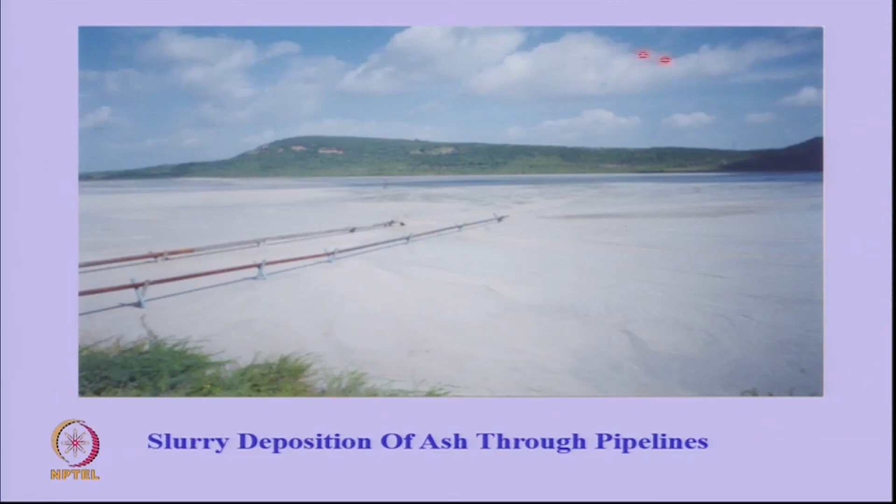So at the tail end of a mine, it's called mine tailings slurry, and there are other types of slurries with which you deal. So we're going to look at some slurry waste disposal sites and what they look like. So this is a huge area adjacent to one of the thermal power stations. This is coal ash. This is water. The ash is coming in these pipelines and being deposited here. And just to get an idea, maybe this is 2 kilometers by 1 kilometer in size.

So on 3 sides are hills. On one side is an embankment. Just like you create a water reservoir, you have created a pond in which the slurry will be deposited. The technique is very simple. You deposit your slurry coming out of a pipeline in a pond. Within a few hours, the particles will settle down and clean water will be at the top. You take it back for transporting more material.

So the water used for making slurry is just a medium for transporting these particles. And it's good because you can pump it. If you were to try and send this material on a truck, it would tend to fly out, so you would have to containerize each truck. This operation can go continuously because the slurry pipelines can work 24/7 as long as the plant is working.

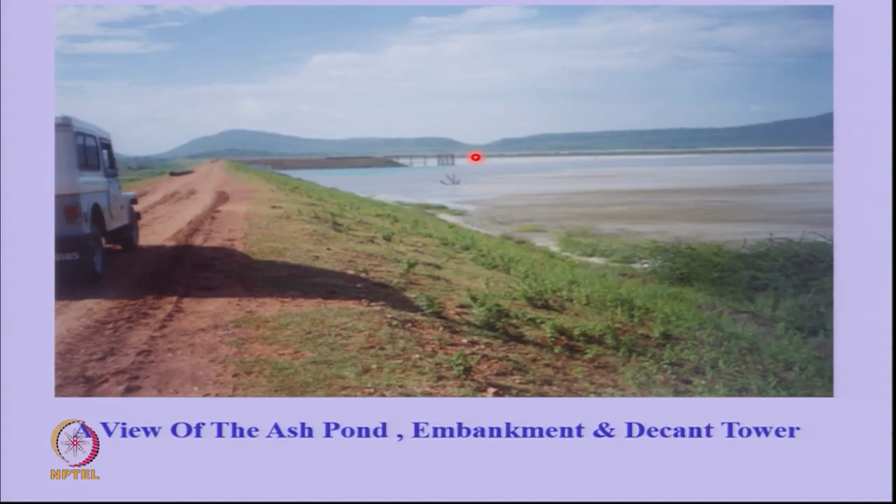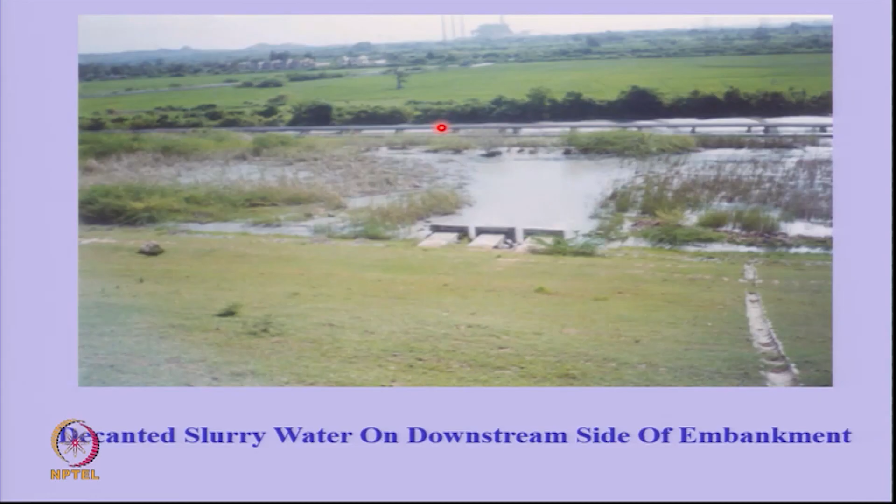So we can see this embankment. There's a water decanting structure because the water has to go back. This is the embankment that you can see. This is the decanting structure. This water falls down into this well and comes out on the downstream side. So this is being taken back again in these pipelines back to the thermal station for recirculation.

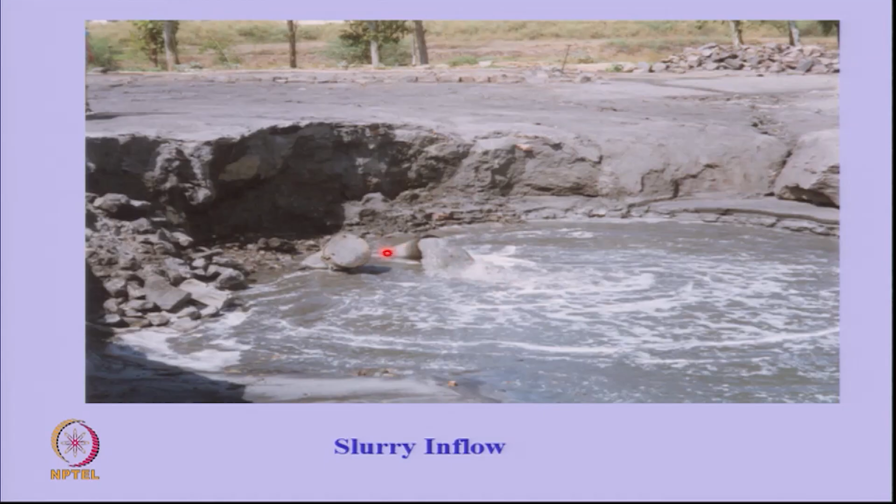Let's look at another ash pond. This is an old small ash pond in Delhi, not 2 kilometers by 1 kilometer, much smaller size. But again, a lot of water being used. That's the inflow slurry pipeline. You can see that grayish water coming in. Here it was not a closed system. Here the overflow water is allowed to overflow through the weir and it goes into the Yamuna.

So if your settlement time is adequate, then clear water will go through. But if your settlement time is not adequate, what will happen? Milky water will go through. So at the time when this pond was operational, this ash is whitish grey. You could walk along the river Yamuna and you could see that in that portion there was milky water which was going in.

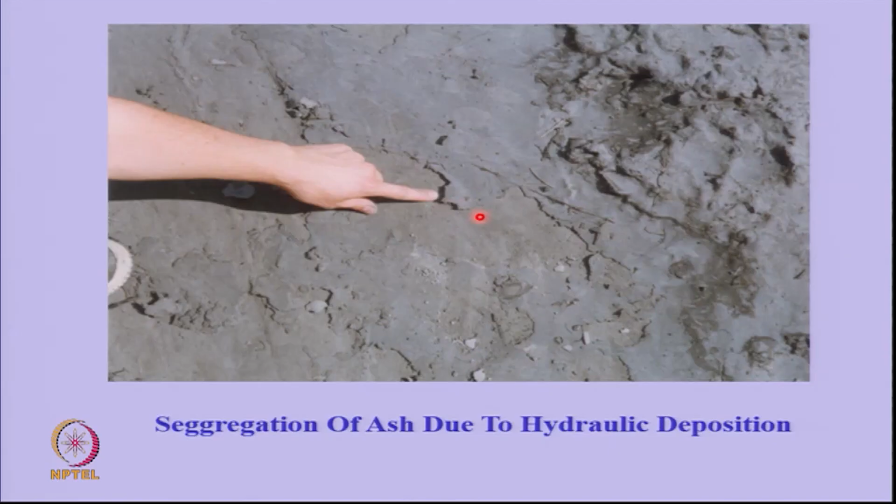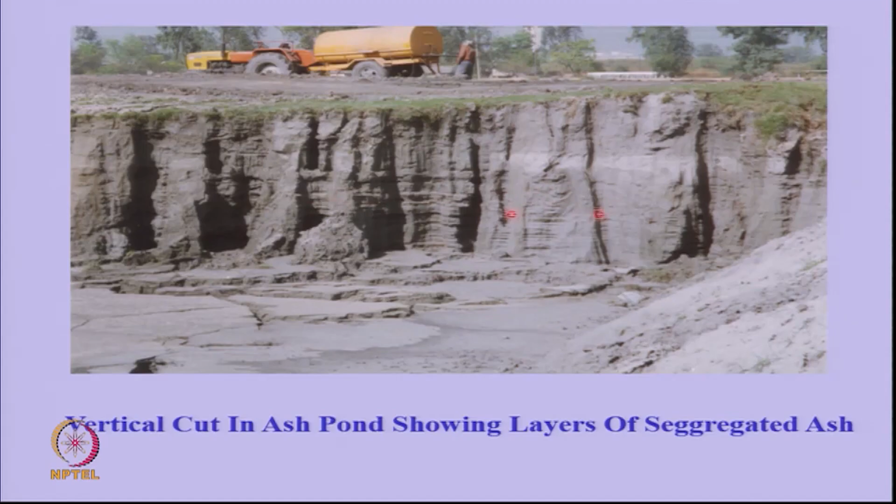That's the way the layers of ash look as they are deposited. If you excavate it, you can see horizontal layers of fine and coarse ash as it is hydraulically settling. First the coarse particles will settle, then the fine. Then the next load will come, coarse and fine. So you can see very thin horizontal layering.

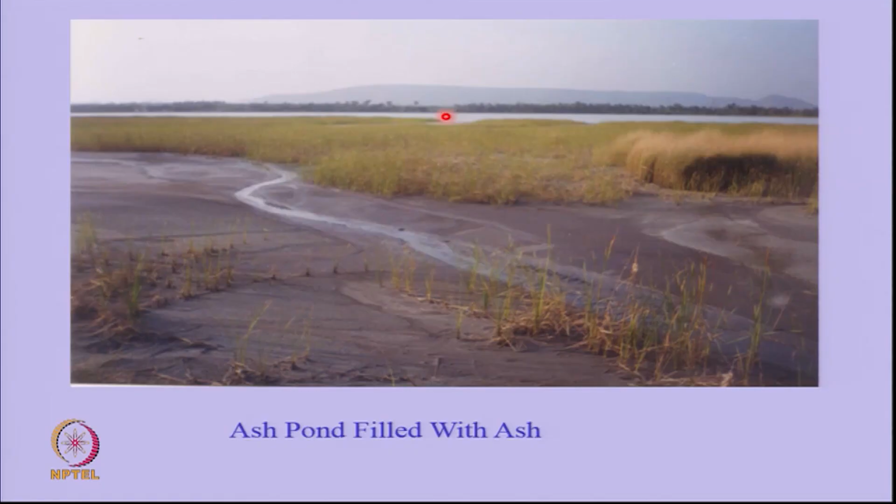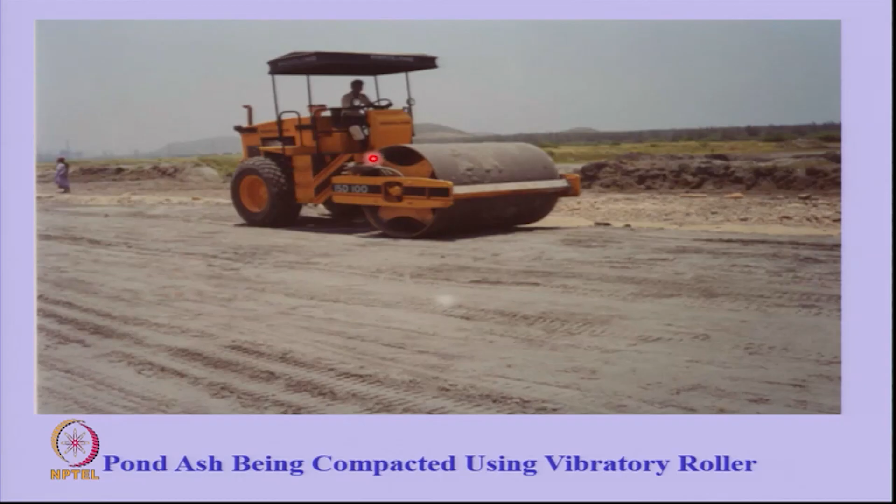This is an ash pond at Visakhapatnam. It's almost like a lake, a 2 kilometers by 1 kilometer lake. And on one end this is full, that's where the slurry is going. And you can use the ash for purposes of infrastructure development. We will do this later. Here it is being rolled like a soil using a roller. The question in your mind is, is this material safe? Is it hazardous? Does it have heavy metals? Can it cause problems? That is something which we will address.

There's adequate information now coming in from the US that coal ash is causing contamination of the groundwater by very few, very rare elements like vanadium and boron. Very mild, but definitely elevated. Earlier, most of the time, this has been treated as not being chemically harmful, and whether that is true for Indian ash or not is something which has not yet been corroborated.

So now, in America, all the ash ponds have to have liners like landfills. In America, just in 2015, the US EPA brought out the coal combustion residuals rules, in which liners have become a big issue. Let's look at another ash pond at Panipat.

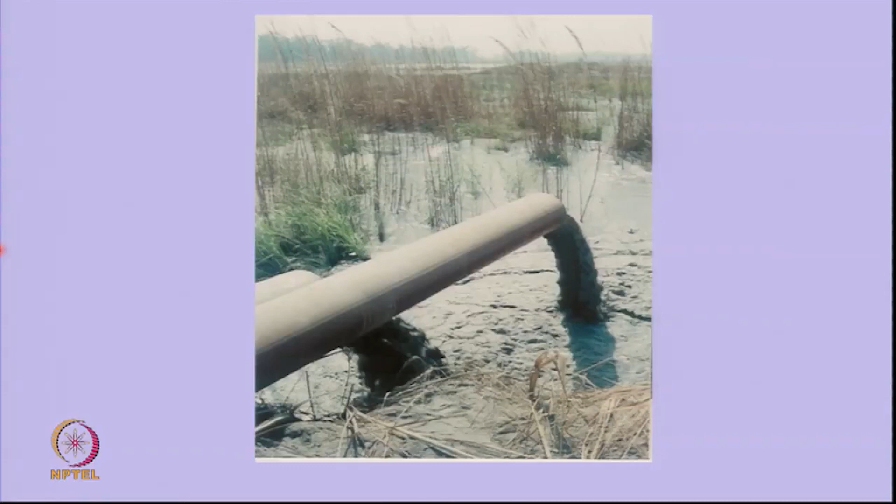Here is the slurry. Lean slurry, I think 10 times the water to 1 time the solids. This is the ash pond. That's your thermal power station. This is a huge amount of ash. You can see if it is dry, it's going to fly. It's called fly ash. It gives you dust emissions. So you have to keep it wet, or you have to keep it submerged if you don't want dust emissions from these. So in dry summer months, these can create a problem.

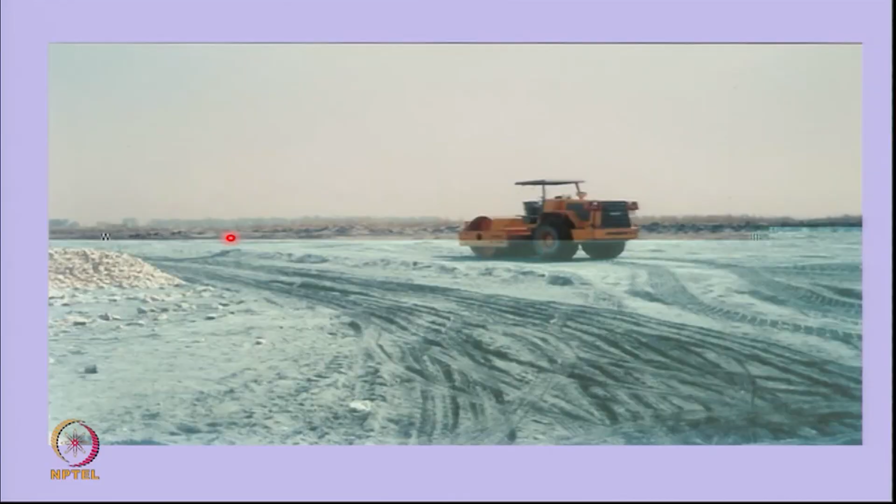Here also they are trying to use the roller for compaction. Yet another ash pond at Delhi. I think this is the Badarpur ash pond. And slurry inflow. They are growing greenery on it so that ash does not fly.

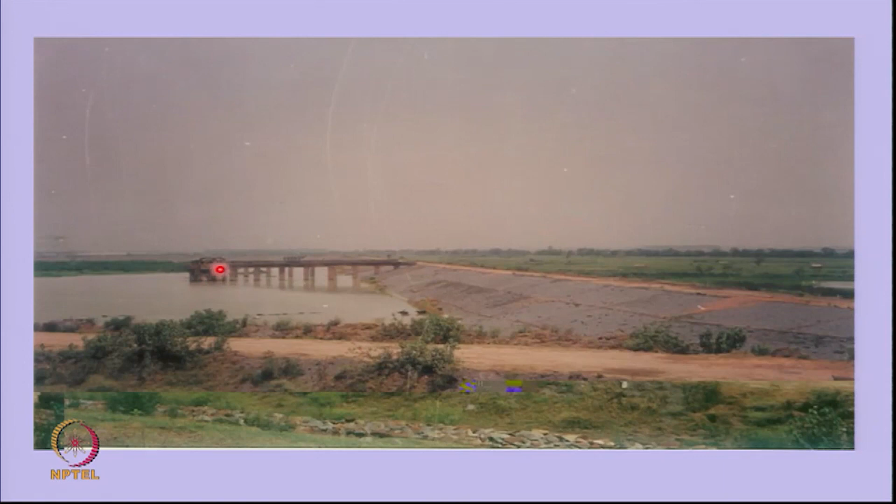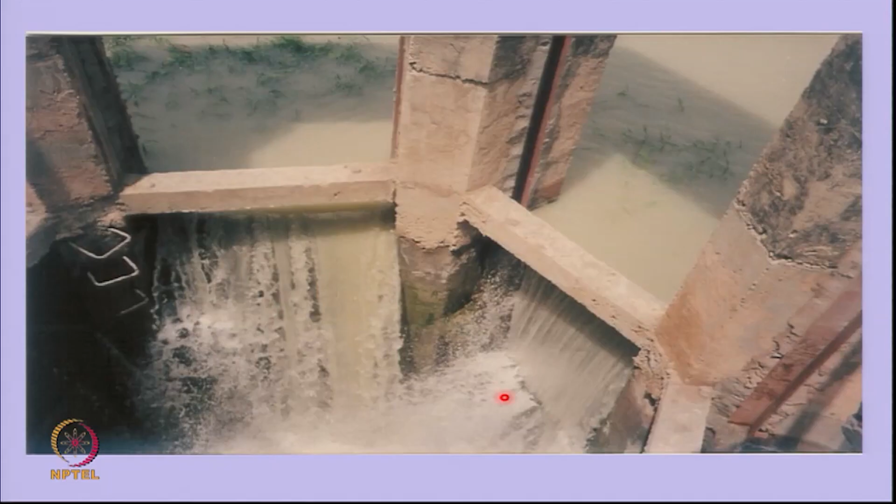Embankment, so the ash is being deposited here. That is the water decanting structure. So as you can see, the water comes into, this is a well, and the water is flowing in. Is this clear water? Not clear, because very fine particles of ash take about 12 hours plus to settle.

So if the retention time is not 12 hours, if the water starts to overflow before that, then the fines will go out. And the limit for discharge to rivers is about 50 ppm. So we have to meet the 50 ppm now. Once this is full, they are growing some vegetation on it so that you get a green look, and the fugitive dust emissions are minimal. That's the thermal power station.

So far we looked at coal ash. We have about 80 to 100 thermal power stations, each producing millions of tons of ash. There's a lot of pressure on reutilizing ash, and ash being silica, there is a tendency to use it in earthworks, or even better, use the ash in cement because it has some pozzolanic properties, and to make bricks.

Anything which requires material. When you make a building, you need bricks, you need concrete, you need coarse and fine aggregate. All these materials are dug up from Mother Earth. But now if you have got a waste material, in building blocks at least the ash is held. In earthworks, ash is not held. It will undergo leaching. In building blocks, you'll have a burnt brick, or in the cement, the ash will be confined.

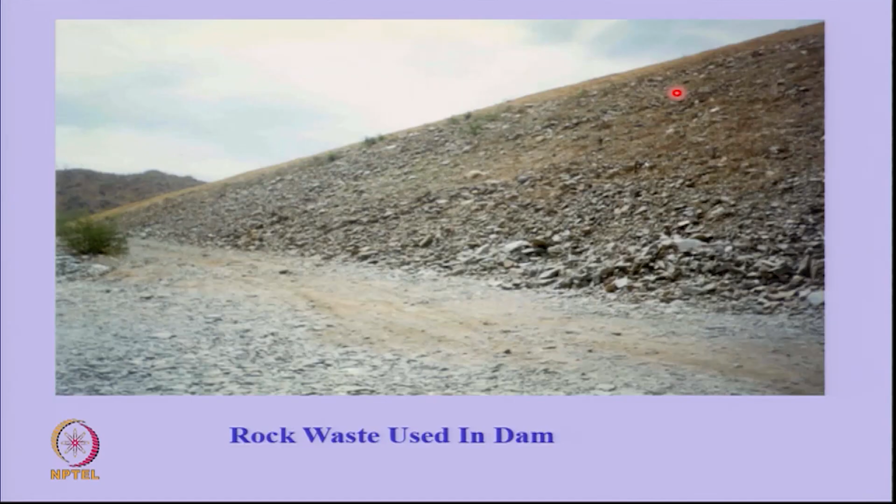Let's look at tailings ponds. This is a dam behind which the tailings are being stored. This dam is made up of rock waste which is coming out from the mining operations. And these are just like ash. You could see a whitish grey material. This is the whitish grey material of the tailings pond.

And again here, it's a cross valley impoundment, so you can see hills on all sides, right? And this was the embankment across the hill. So it could have been a water reservoir or a water dam. See? And when it is full, then you try and grow some vegetation on it to give it a green cover.

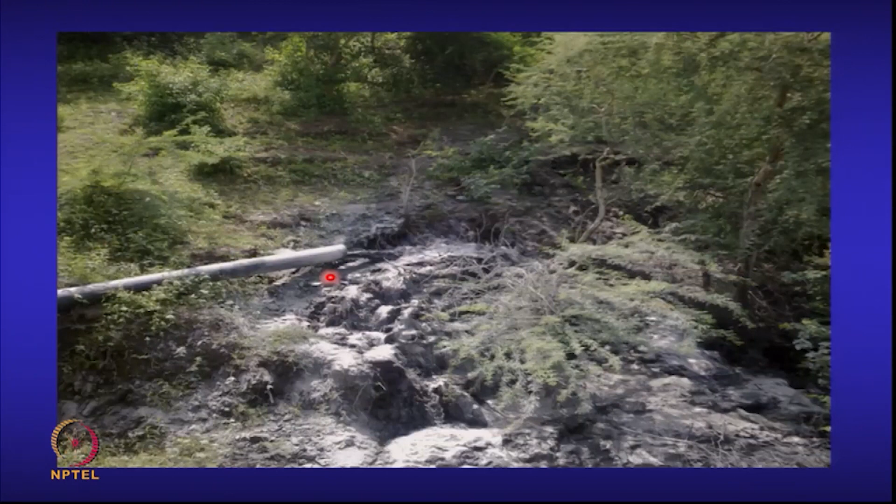This is yet another tailings pond. As you can see, these are the tailings. This is the water which has accumulated. This is the embankment. That's the slurry pipeline which is coming here. It's being dropped at the side of the hill. It falls down into the reservoir. And this is gradual filling up of the reservoir with the tailings material. This is the second tailings pond.

Similarly, this is at the third site, again in Rajasthan. Looks like a lake, wonderful lake. This is also a tailings pond. This is the embankment, must be about 10 meters high. You can see the pipeline, that's the slurry pipeline. Slurry coming in, this is the deposited slurry, that's the lake. So the water is ponding there. They are holding excess water.

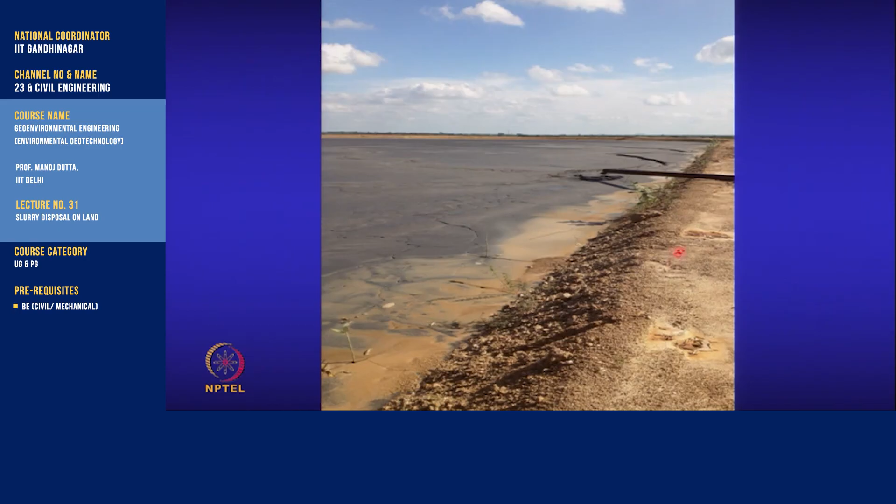And this is almost full. Now this embankment is full. Still slurry is coming in. Eventually they'll have to raise the height of this embankment to fill in more material because the plant is continuing 24/7.

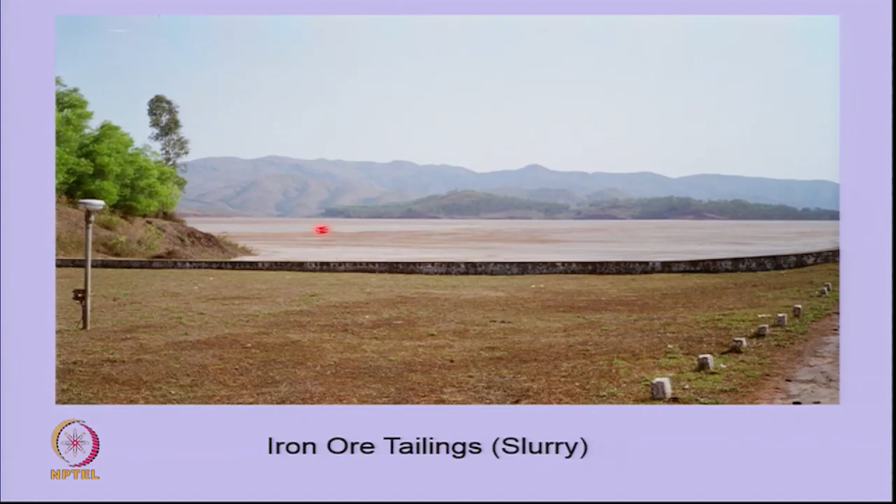This is the highest tailings pond of the country, now no longer operational though, a 100-meter high dam. These are iron tailings in the form of a slurry. This is a huge dam, again see some hills here. So wherever you have a hilly area around you, you can just make the embankment on one side.

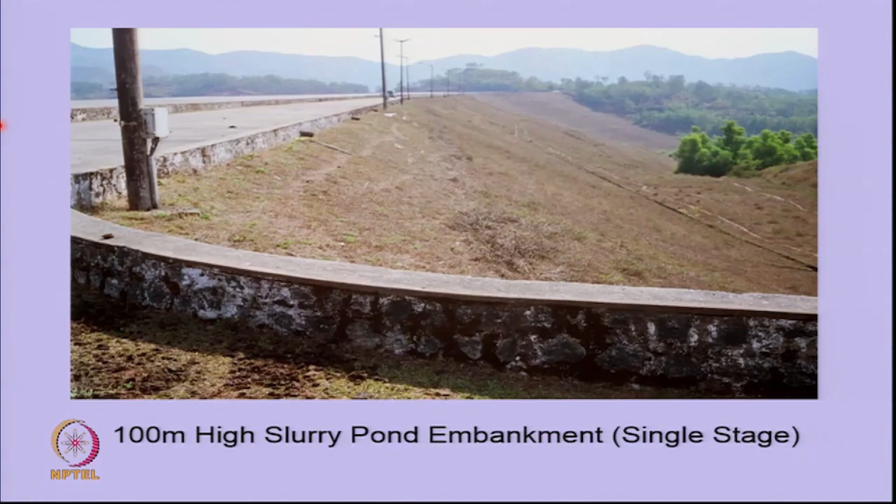But if you have got plain ground, then what? You have to make the embankment on all four sides to be able to make the pond, so that it can allow the solids to settle down and allow decanting of supernatant water. And we will discuss this later.

This is the rock toe of this dam. So the dam is about 80 to 100 meters high. The rock toe is 10 meters high. Important thing for you to remember is these slurries are full of water. So you have to design these dams as if they are water reservoirs. And you will have seepage through this and the water will come out on the downstream portion.

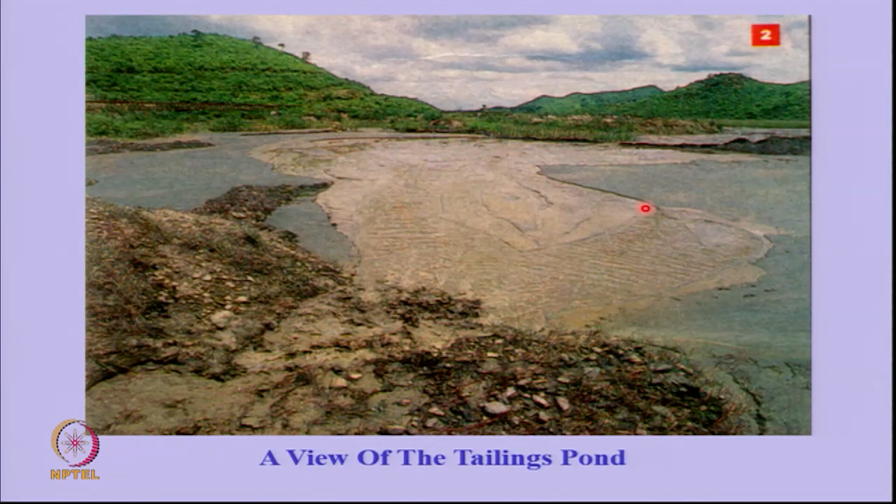This is a photograph of, I have not visited this, but in one of the magazines several years ago this was reported. This is the tailings pond for uranium tailings in Bihar. It was affecting the local population.

It's not only mine tailings which may come out in the form of a slurry. Here is a process called mineral extraction which releases a slurry known as jarosite. And have a look at this. This is a jarosite pond. No water, you can just see some yellowish material. It's a hazardous waste, by the way.

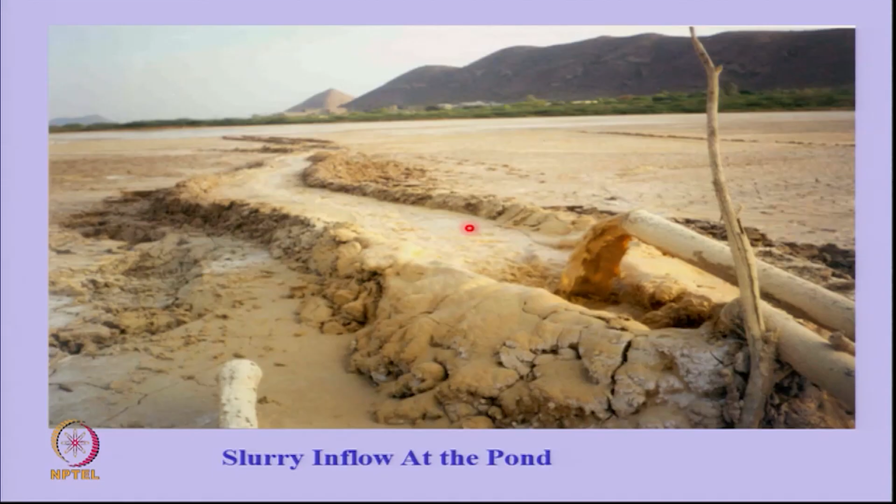The waste is coming in the form of a slurry. So here also you can see just some accumulation of water there which is being decanted. So this is also hazardous waste being disposed in the form of a slurry. It has a liner and it will have a cover. But when you look at this whole area, you see that it's not green outside and the vegetation is getting affected by the constituents of the slurry water and it is drying it out.

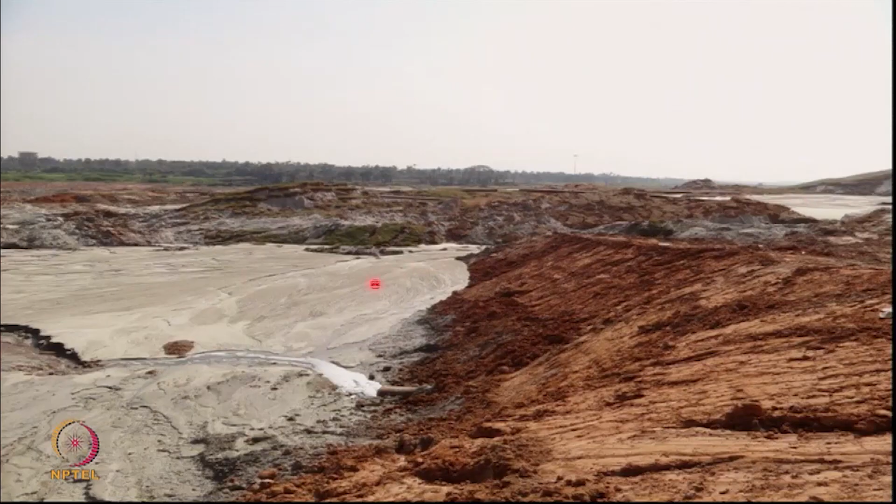Slurry ponds appear to be very simple to make, but you have lots of distress in them. Occasionally you will find it will breach because they are not well maintained. So I'll just give you some shots. That is an ash pond which has breached, this embankment has broken and material has flown out. You can see this breach. Ash is behind this, it has flown out for a few hundred meters.

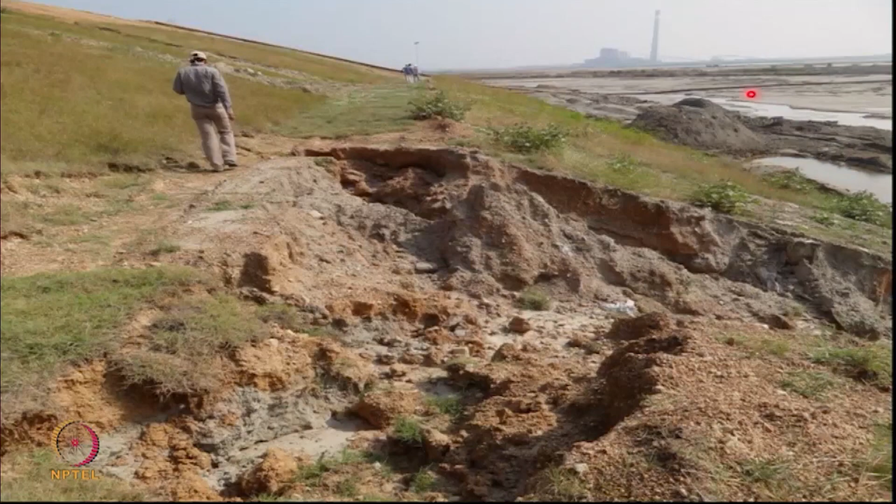Because once the slurry starts to come out, it flows like water. It doesn't stop at 10 meters or 20 meters. It's not a thick paste. And just to give you an idea how far this slurry has come. Can you see that? And embankment failures. And you can see this is spread over here. There's slurry water and this embankment has failed.

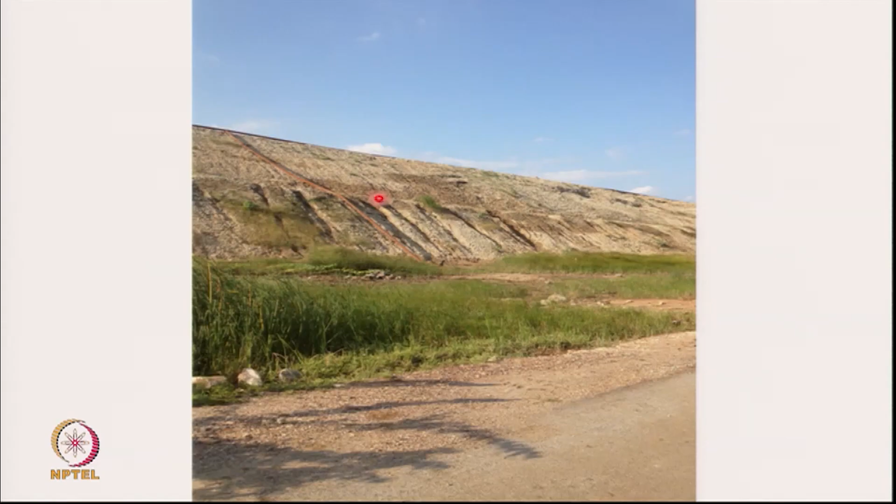Some more shots. This was when I talked about embankment. You can see that this embankment is also undergoing distress. Can you see these erosion gullies? This is stage 1 of the embankment. This horizontal line you can see, this is the crest of the first embankment. Okay? And this is now the second embankment.

Now the problem is the joint between the two embankments has not been designed properly. So what is happening? This is becoming a seepage plane. Horizontal permeability at the crest of the old embankment is high and water flows out and is eroding this embankment. And this required remedial measures, because once this gives away, the whole mine tailings will come out. Here's a better shot of these erosion gullies. And here is the road on which we are standing.

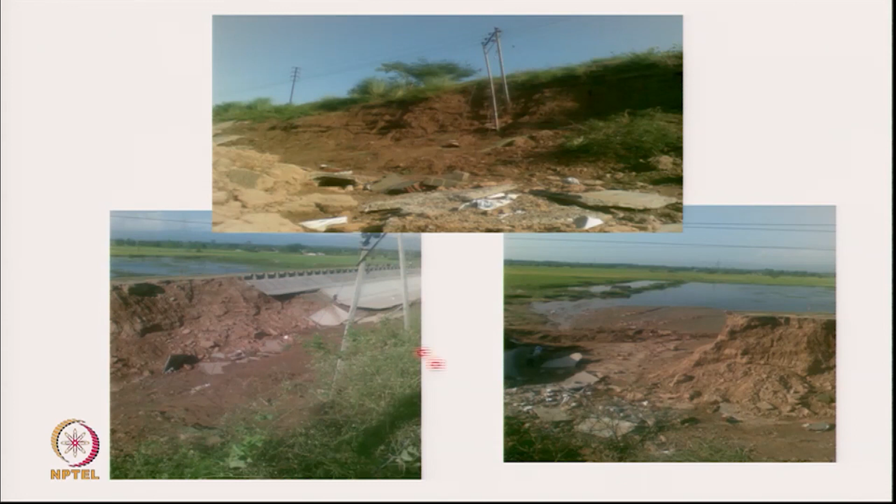And here you can see, you stand on the top of the second raising, and this is the original crest, you can see it's wet. So it leads to seepage of water, and some distress is already beginning to show up at that site. This is another location where there was distress to the embankment and a nearby canal due to an ash pond being nearby.

So what I'm trying to say is that when you deal with slurry ponds, once the slurry dries, it is just powder. So it doesn't look very challenging. After all, you are just storing powder behind an embankment. But if you don't treat it like a water reservoir, and especially when the heights of these embankments are now going 20, 25, these are incrementally raised. You'll make a small embankment, fill it up, then make the next height. If you don't design them like water reservoirs, water is very difficult to handle, remember that. So you always feel, no, pani kam kar denge, dur rakhenge, we'll keep it away from the embankment towards the center. It doesn't work. These tend to get breached and they have problems related to that.

The same material which we are talking of, which is coming in the form of slurry, can also come out in the form of dry powder. So out of the 80 to 100 odd thermal power stations, we have one station in which it is being handled in the dry form, and that's at Dadri. And here we are making a mound of the ash.

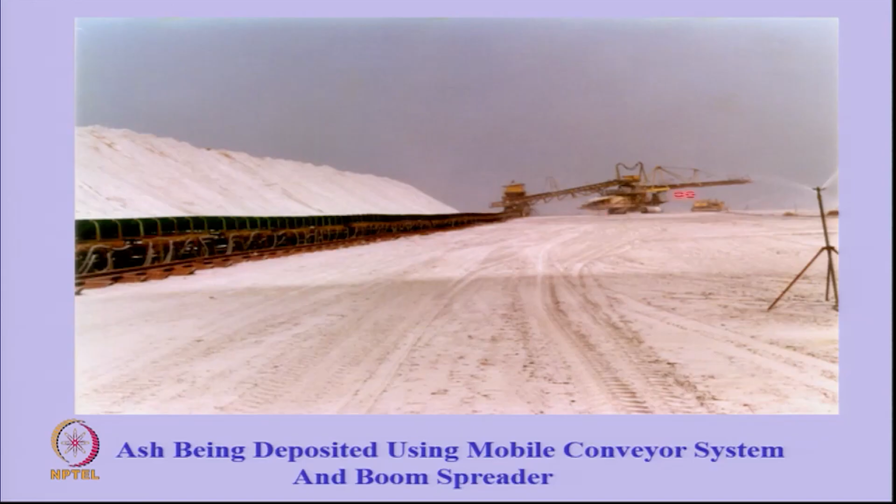So this is the ash, it is coming on a conveyor belt. It comes on this belt, this conveyor belt goes up like this, and then it falls, and here it will form a conical heap. And this height is about 15 meters. So this boom spreader will spread this 15 meters high.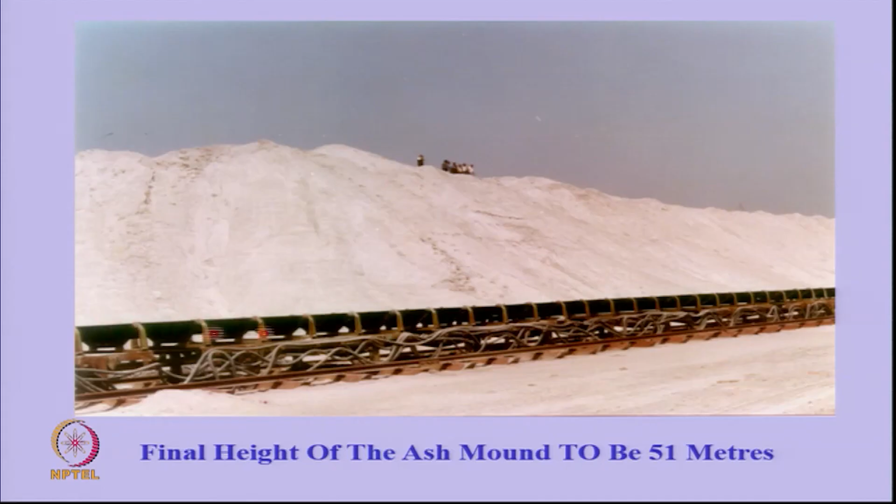And just so that you get the idea, this is us, people who are 2 meters high. So definitely this is about 15 meters high. And that's the conveyor belt on which the ash comes. So the ash is not coming in the form of a slurry pipeline, it's not coming on trucks, it's coming on a conveyor belt.

The question you would like to ask is, what happens when it's raining? Because the conveyor belt is not covered. So if you have fine powder and it starts to rain very heavily, what will happen? It will start to get washed away to the sides. So you have to take many adequate measures.

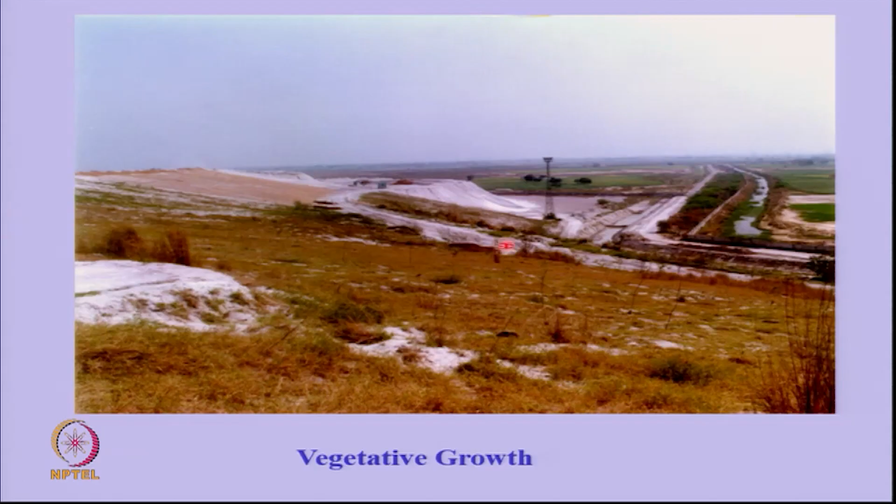What happens once the mound has been completed? This is supposed to be a 50-meter high mound. Then you can grow grass on it by putting some soil cover and give it a green look. All the visitors go here for a very nice green look of the ash mound.

But I'd like to remind you that a person walked into my office several years ago and he said, "Sir, I've come from this place. Can you tell me what to do about this?" So this is also, I don't know what this is. This is also some powder which looks very much like the mound that we have got.

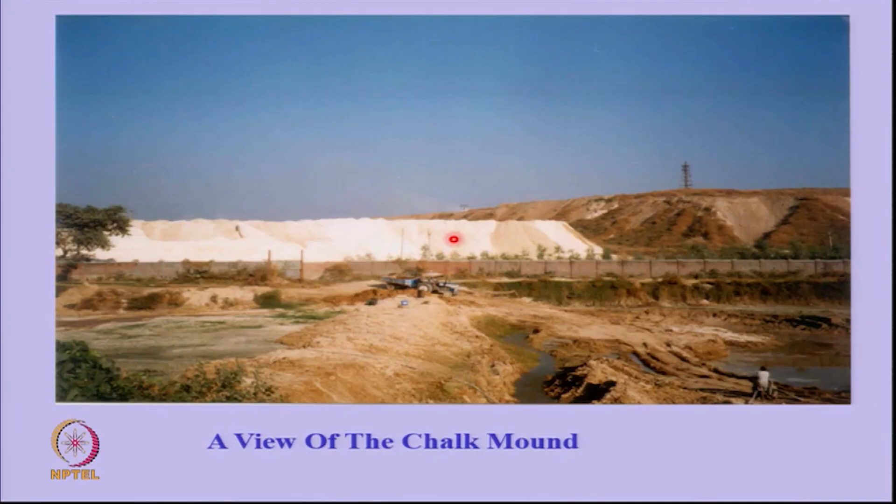The Dadri, it's also powdery. This is the old thing where they have done vegetation. This is the new waste being deposited. And you can see some failures. So he said, "Ye chalk hai." Maine kaha, "Acha chalk hoga."

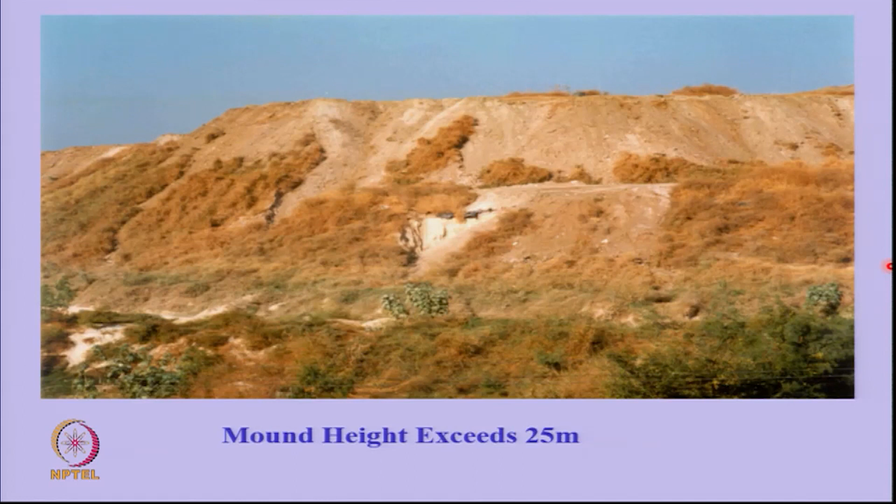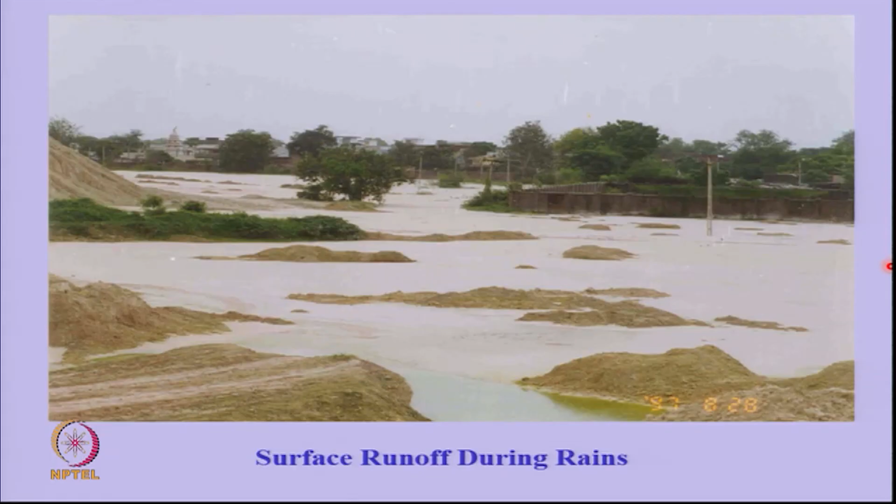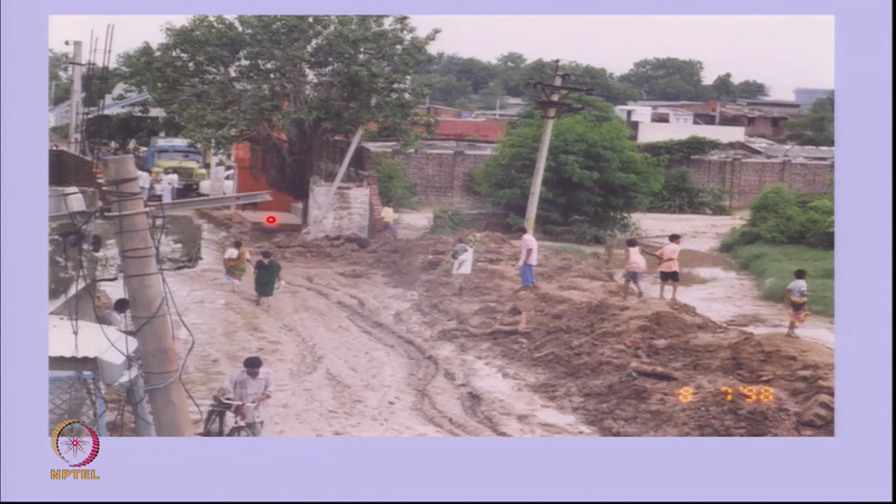But what happens when it rains? So it looks so simple, it looks so easy to deal with. And when it rains more, these fine particles start to move with water, and once they move with water, they'll come down the mound. And this gentleman who had come was from some village, so this water was coming down and it was going into the village.

So the issue is, fine particles are very erodible. If you want to contain them, you have to give them a proper cover with proper vegetation. Otherwise, they are prone to erosion by water. So most of the fine powdery wastes which can be transported in the form of a slurry are transported in the form of a slurry. It's only the larger heterogeneous wastes which come to you in trucks. So I've just opened a new world about slurry wastes for you.

We have to design these waste disposal facilities so that they remain and they perform without affecting the people around them. And the real challenge is that because they are in the form of slurry, if there is a breach, they flow out. Now that kind of problem doesn't exist in the landfills that we are dealing with. If I have a municipal solid waste landfill and it breaches, it will come down by 10, 15, 20 meters. It will not travel for a kilometer.

But many slurry ponds have breached where the ash has gone down a few kilometers, like water. It's like a pond has breached, and then it has affected human beings and houses on the downstream side. So the challenge here is how to design a system, since it is slurry waste. It has to be deposited between embankments so that it doesn't flow out.

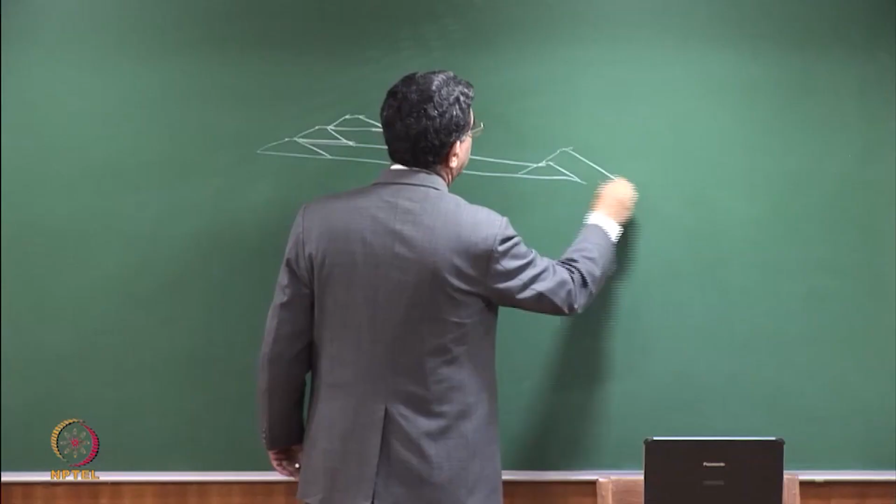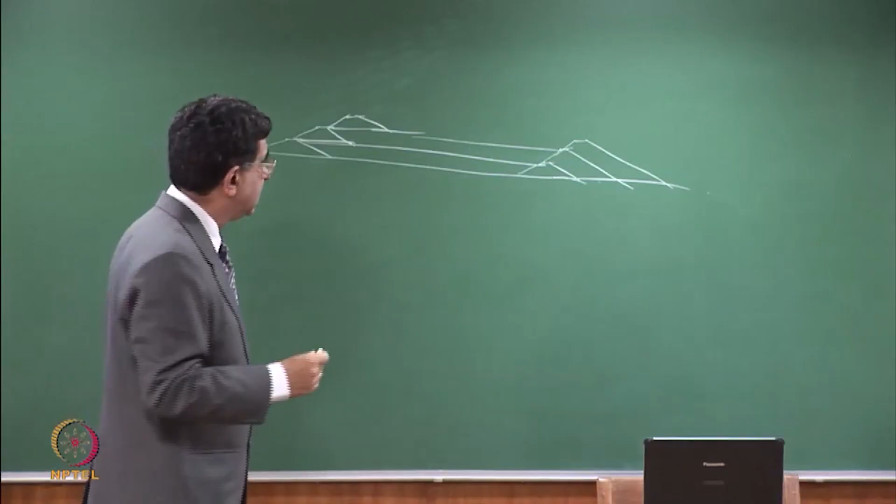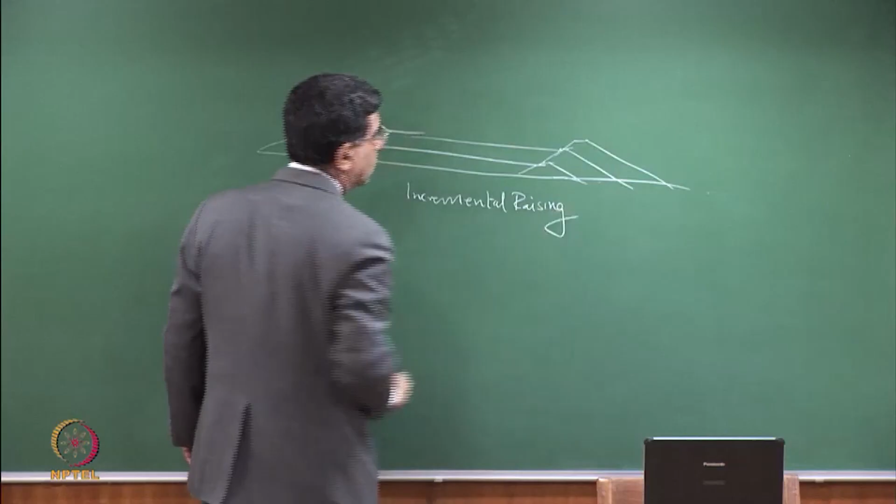When this fills up, this is called the upstream method, or you will use a method called the downstream method when this fills up. So there are different methods, but this is called incremental raising of embankments. So this design is something new. So for slurry deposited waste, an important thing is incremental raising. So over the next few lectures, we are going to first study what